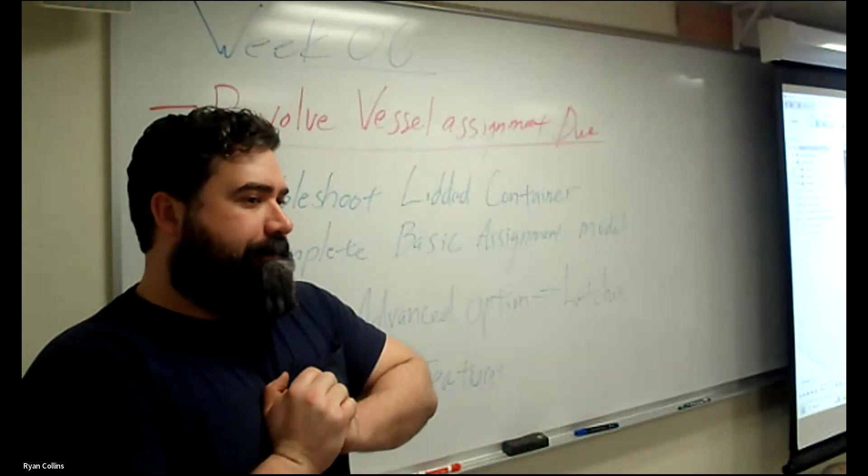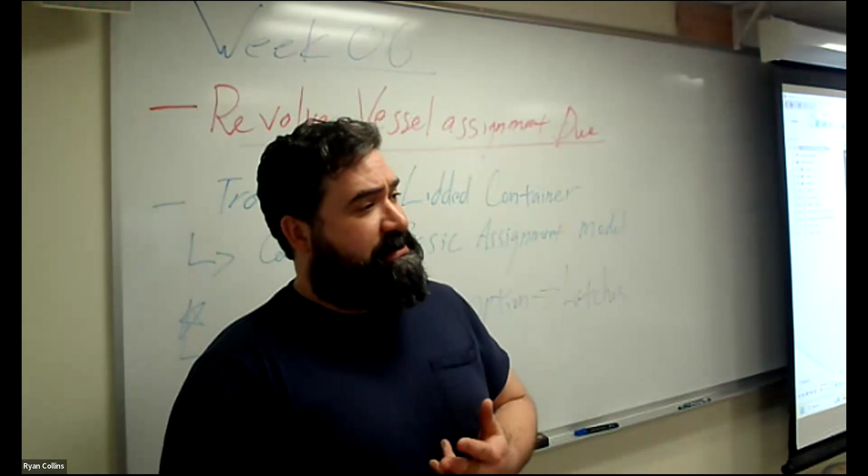Tonight we're going to add to our lidded container project. We're going to be adding some features to it, like a little thumb catch, and ideally some sort of simplified clasp. After the fact, we'll be adding more advanced options for actual functioning closing latches and additional hardware. But for the basics, let's hop back over to Fusion and work on our containers.

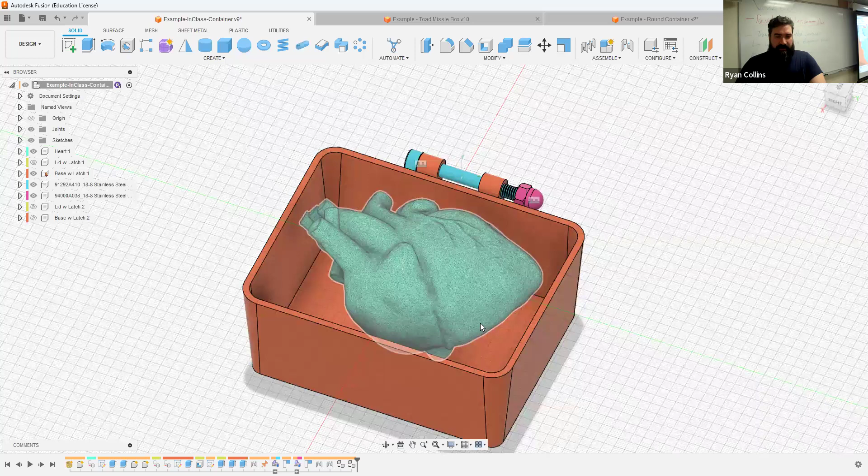So we last left off having finished making the lid. It has whatever your imported model is, in this case a heart as a mesh, which is why it's super detailed. We imported some hardware, snapped them in place with the joint tool, and set the joint limits for the container to open and close.

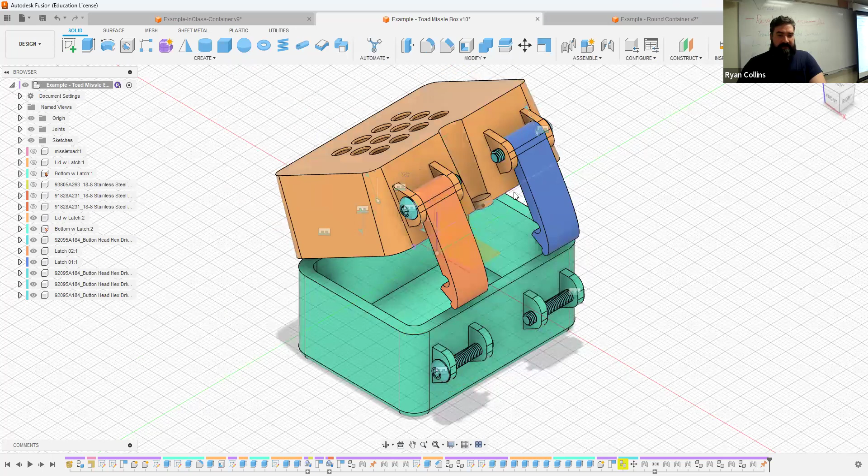So what I wanted to do tonight was go over some different options you could make on this. Let me hop over to one of the other examples, where I had added multiple latches, which is what we'll be modeling additional components to, so it actually opens that way, latches open and close, all the fun bits.

But let's simplify here, hide all of the previous versions, and switch over to my missile toad and its latches. Oh crud, I added those to that one, not to that one. All right, oh, they're copies, and they're linked. Oh well, that's okay. Ultimately I made copies of these existing objects, and they are linked.

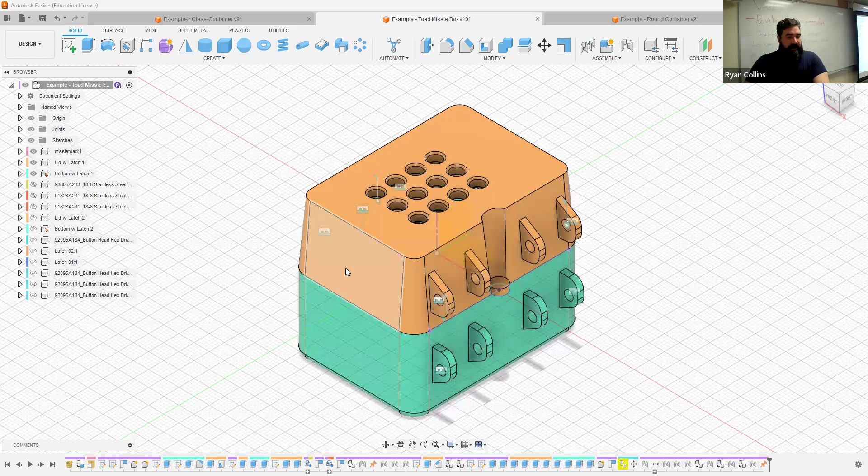So when I added the tabs and such for the additional latches, it added that too. But that's okay, doesn't matter.

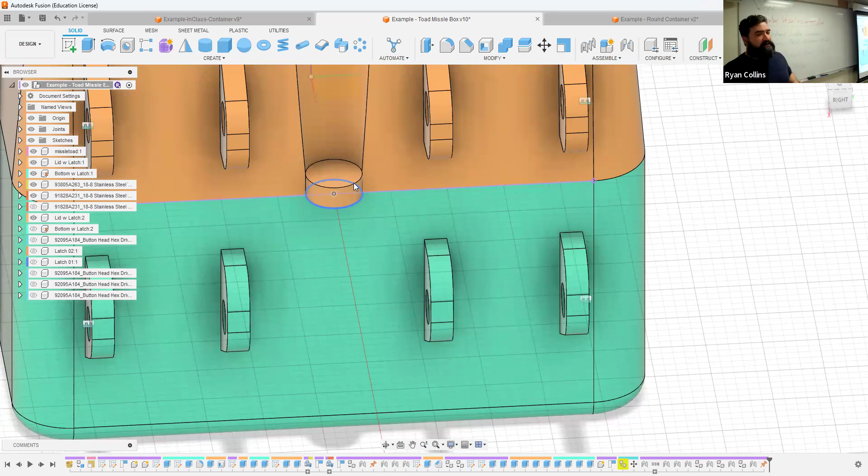So with this model, one of the things I did was add this little simple thumb catch. That's just literally a spot where your hand or thumb could grab onto the object. There's any number of options for that. That is simply one of the features required for the assignment, some sort of additional feature, as well as some sort of, or the other option is a variety of holes and such.

You could use a singular drawing, or a variety of patterns, either with the circular pattern, pattern on a path, or the rectangular pattern tool. And you could either use extrude to cut straight through, partially through, or the emboss deboss tool to have it raised, lowered, or it could be text. Any combination also.

It's up to you, but I wanted to start with just some simple options here. So let me hop back over to the model we were working on, and something like a little tab or so.

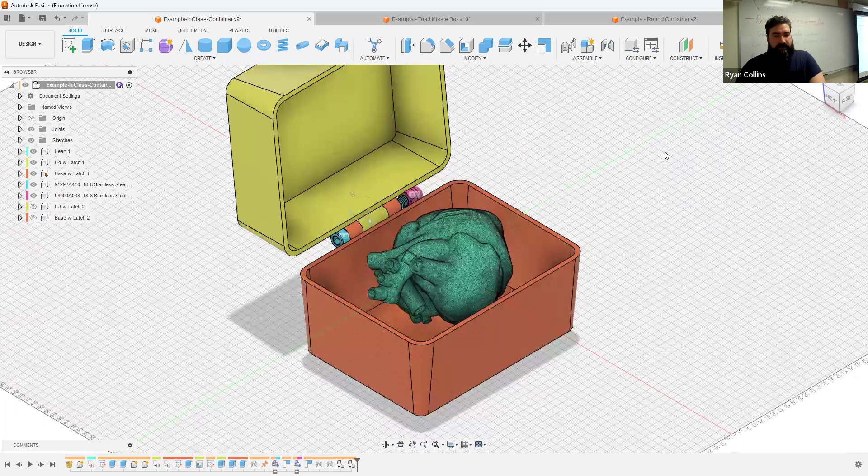Now one of the tricks to this is that depending on what tool you used to hollow out the object, it will influence how you make additions to it. If you used a shell tool that hollows out the inside of this part, you would need to make this feature prior to the shell, otherwise it's going to cut directly through this thin wall. If it's an extrude, you're going to need to go back and re-edit that original sketch. But let's work with what we got.

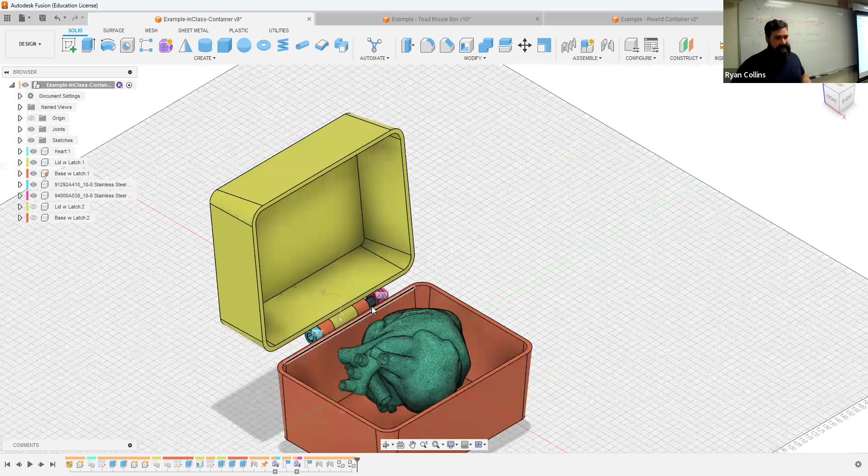I think we did the lid with a shell tool, so what I'm going to do is just model something simple like this. This little thumb catch, which is just an extruded circle, but it also projects upward with this notch here.

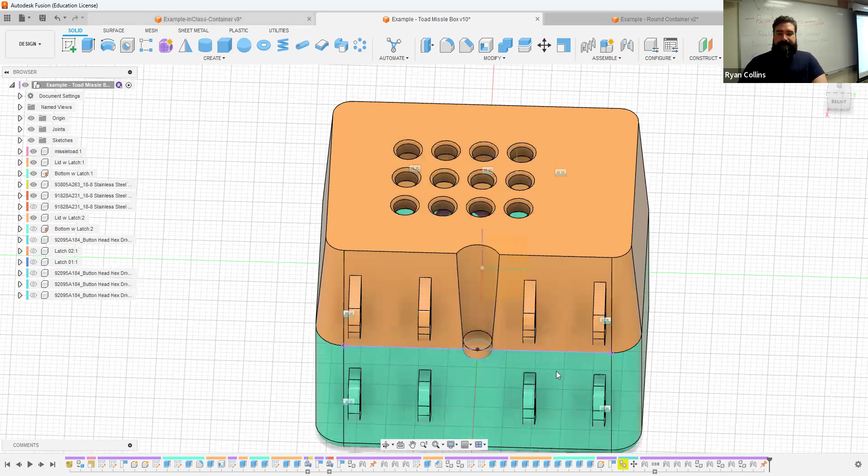And how I did this was depending on where you place this in your timeline. As we've said before, you can mix and match and move your timeline back and forth. You can swap the placement of certain tools, and that is absolutely what is necessary for something like this. This thing is always in the way, the zoom tool.

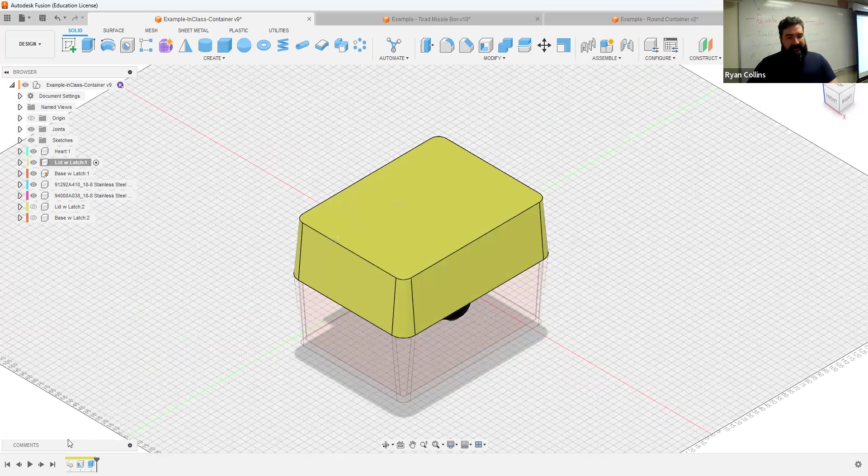So what I'm going to do for that is first off, let's activate just the lid. Well, looks like we did use the shell tool, great, but because we made the original sketch outside of any of these, I have to go back and activate the entire project to do this.

So let's jump back to the original sketch, not the heart one. That was just the basic outline we used. I'm going to go back into that, or I can add to it with a second sketch. Let's keep it simple and add to this sketch.

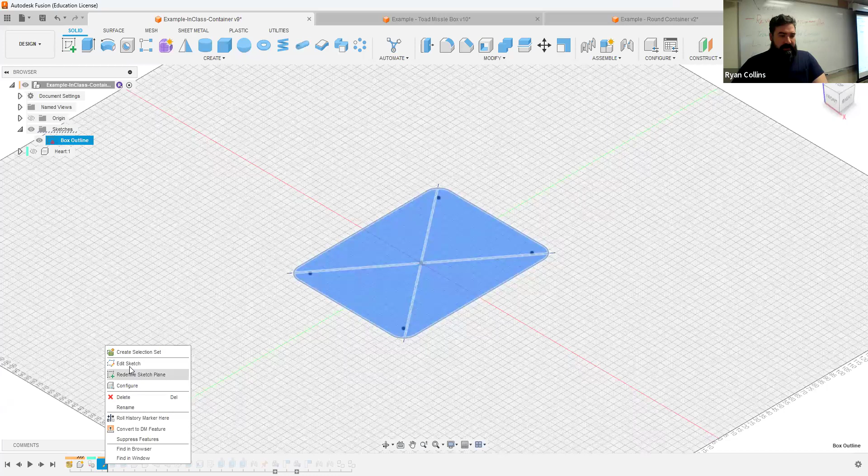Go to the sketch, mouse over, right click, edit sketch. I'm going to go to what will be the front and use the circle tool, snap right along, and my constraint tools come up. The plus sign and crosshair switch to an X, denoting it's intersecting two lines, and the triangle comes up showing it is a midpoint.

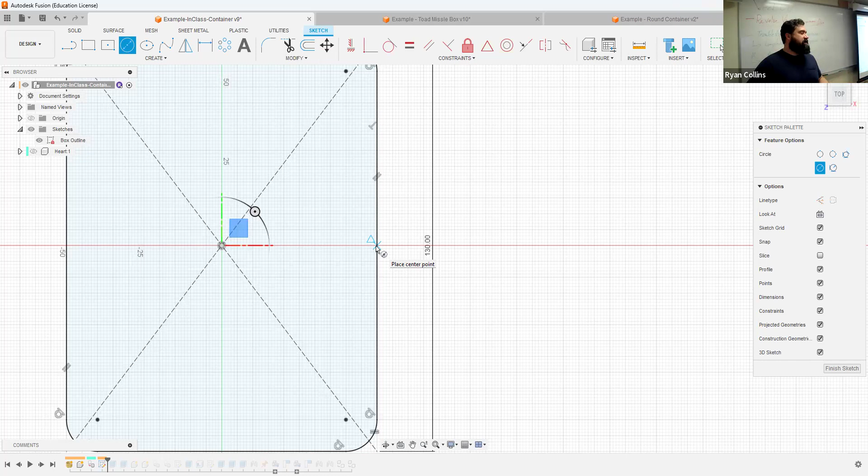I'm just going to draw a circle, maybe 10 millimeters. That seems reasonable-ish. Let's make it obscene, let's make it 20. It's just crazy, whatever, okay, just slightly larger. Great, finish sketch.

Outright, this shouldn't alter anything since I haven't selected that for anything. But we know we're going to create extrusions to make these parts, so let's edit that extrude. That was the bottom one, don't want that. We made the base before we made the lid, so make sure you got the right one.

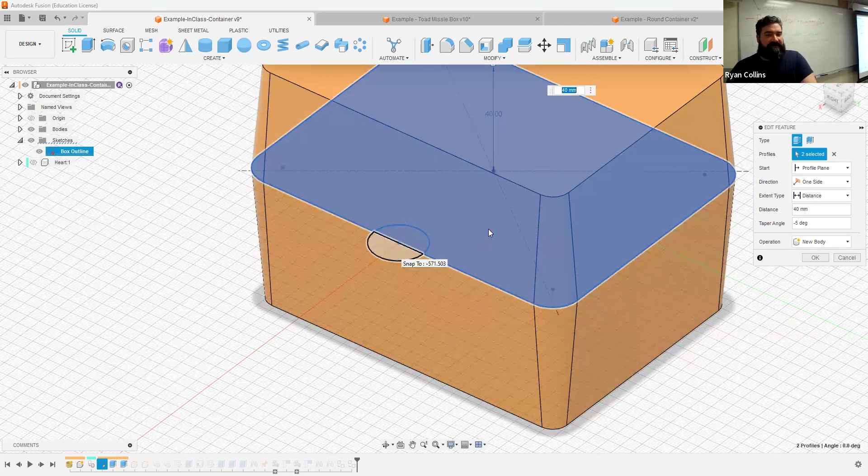So what we're going to do with this is I'm also going to select here, but that throws stuff out of whack. So I'm finding I need to create a second extrusion because this will only extrude the same height. I can only do it one height, but that's fine. That means it needs to go there, but it needs to happen before we make the shell adjustment.

There we go. Why is that hidden? Where are you? Why is it hiding from me? That is odd. Okay, that's funky.

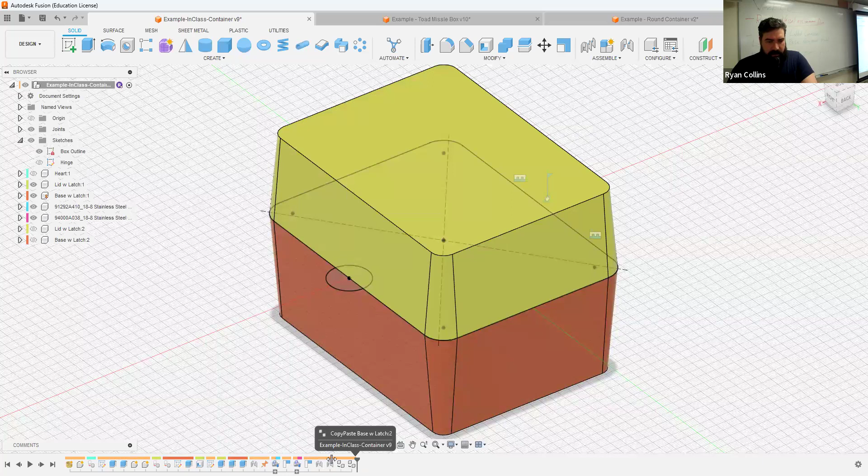Sorry, bear with me a moment, I don't know why it's hiding. I was having an issue with visibility stuff earlier today. It's physically there, but for some reason it's not showing up. Well, that's mildly irritating. I don't know. Awesome, always good to be completely flummoxed.

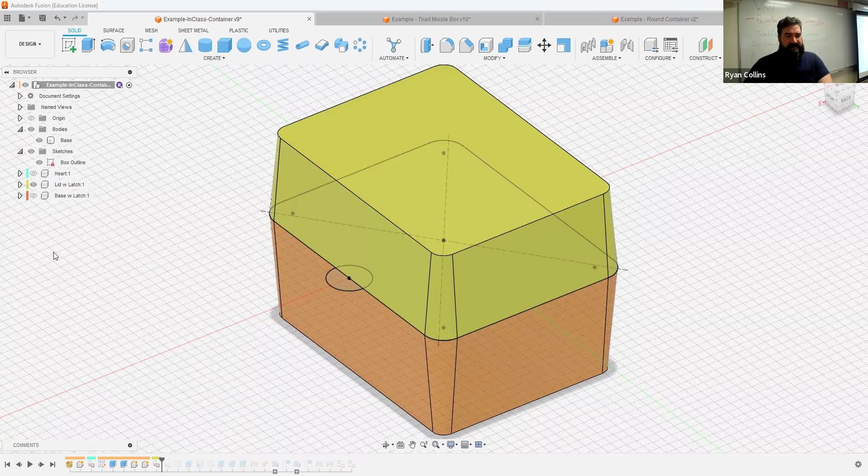It's still before the shell operation, so when I hide the base, there we go, still solid. All right, great. So from here, I'm going to extrude just that circle, but I want to make sure I get both the inside and outside, the whole thing. Not negative, I want to go positive up, like 3 millimeters.

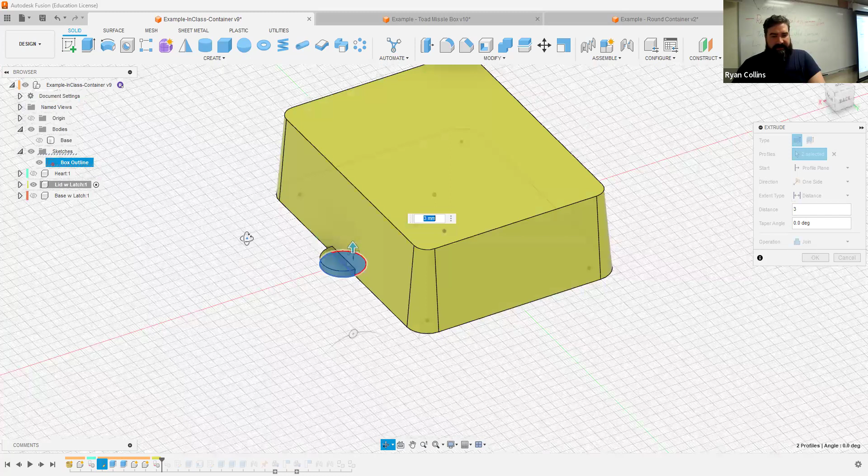Just making that little circle, not cut, I want to join that body. There we go, just making that little function there. The reason I'm doing that is if I don't have that shell tool function beforehand, when I hollow it out, it's small enough that it would otherwise not show that feature.

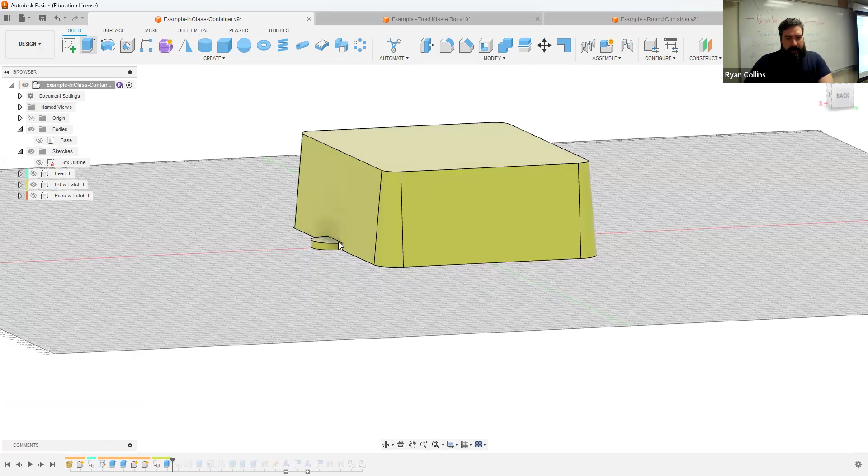But I also want to make that little recess, so I need to add an additional thing there. Let's add another extrude. And from here, of course, it hides that sketch. I want both of those.

But if I extrude upwards, now it's going to cut all the way up to the top. So let's set extent type to object, the lid, but it's going to cut everything, including the little tab I just made. So I can start the thing offset or from an object, so I don't actually have to start directly from the original plane.

Problem is it's cut right through. Excuse me, so maybe I should have made this part first. We'll find out.

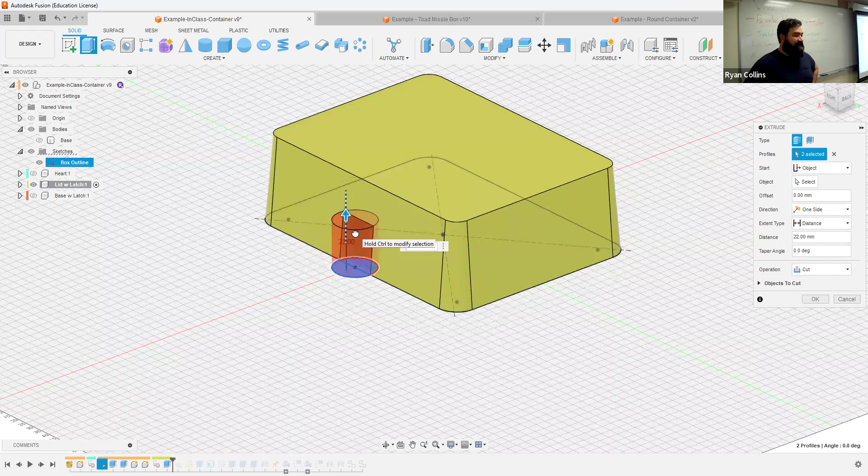Because I've already made the extrude and dragged this piece all the way up, it's not letting me show this piece. But that's okay. The reason for that is if it's already cutting through an object, it's not going to stay visible. So before you slide that part up, let's select start at that position.

There we go. But it's not... okay, great, now it's doing funky stuff. I just canceled that so it didn't cut through. Unfortunately, I've found that if you start to input information into your toolbox features, be it extrude or whatever, sometimes if you add information before you complete where it starts from, it gets a little cross-wired.

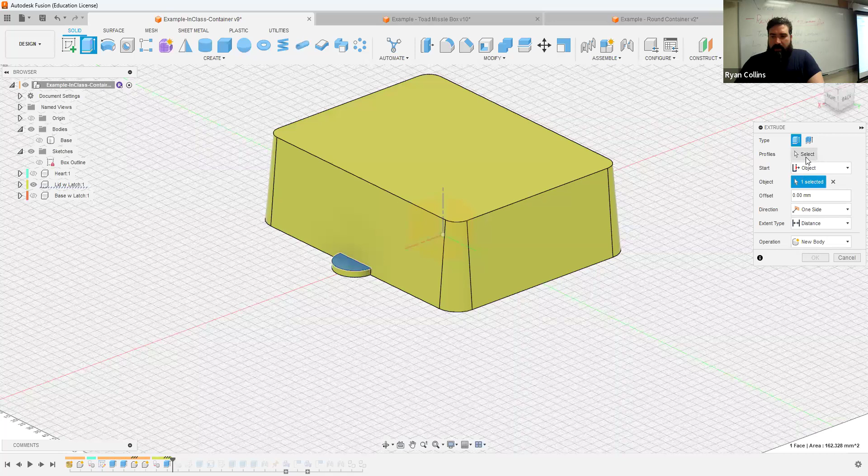So just starting over, doing what I was talking about: starting rather than at the profile plane, at the object. I'm going to select starting there. And of course, it hid my profile, so I got to find that again. I want both of those, and it's starting at that object.

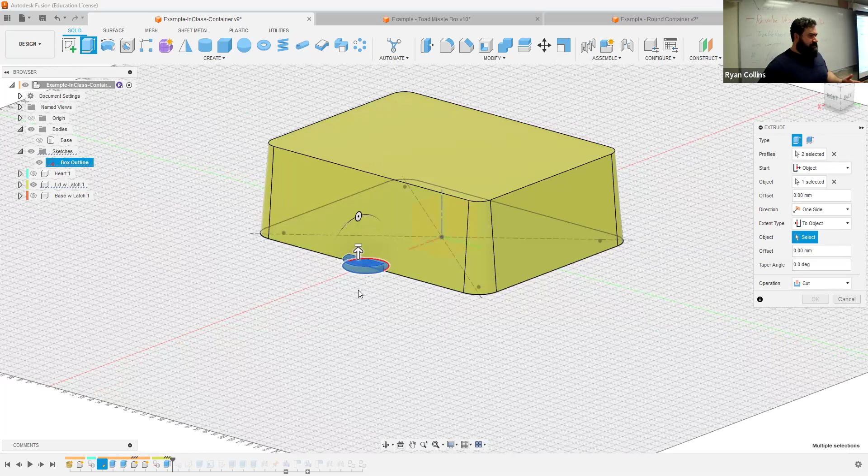Great, so now when I extrude upward, it is not interfering with that tab. And my extent type is set to object, rather than trying to remember what I measured it to - just snap to the top. Bam, there we go. So that's all, I'm just making a little cut feature in there. I hit OK, and now I just have this little thumb catch with this snazzy little recess.

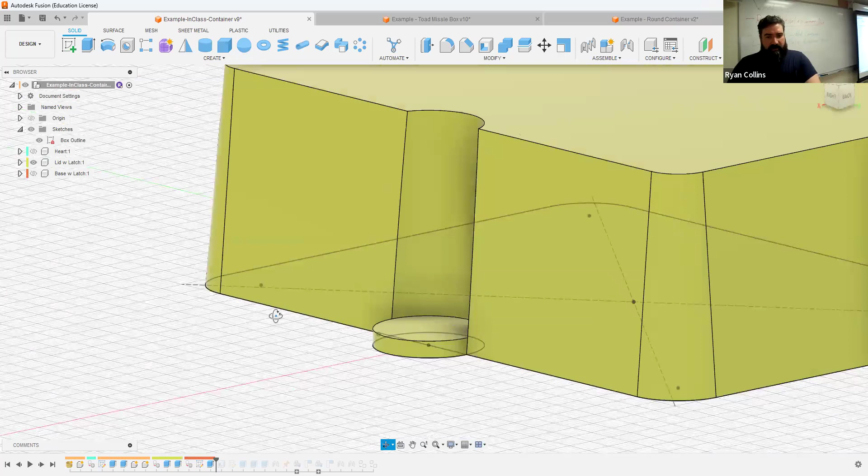So now when I go forward, let me orbit up and I'll show you what's going to happen. I'm going to move past the shell tool operation, which hollowed this whole thing out. Before, it was completely rectangular because the object was rectangular. Now, all right, so this can happen - we'll fix that in a moment. It just made the shell around that little bump out.

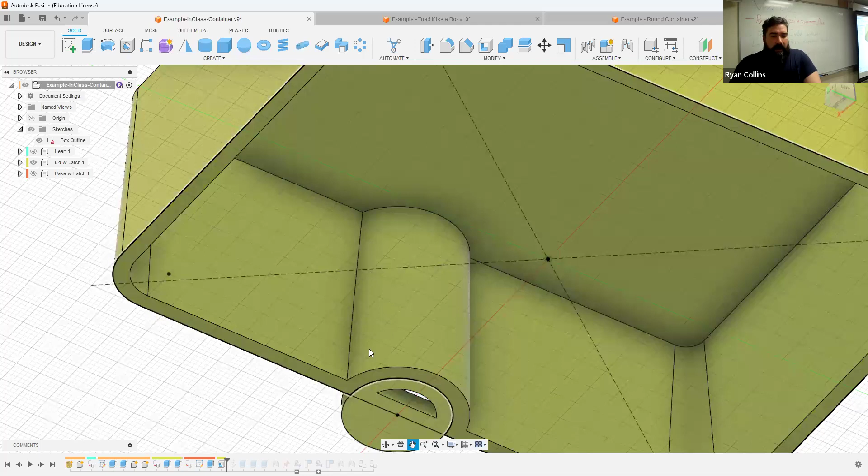So that's all, you're just making a little feature there, but it helps - it's a way to work around anything you add to it. And again, because we made this whole thing a tapered extrusion going upward, it already takes that into consideration.

Now, one of the things that can happen is this right here - excuse me, this right here. This is because this was connected to here, but the shell tool reads objects in kind of weird ways sometimes. So let me go back and double check this extrude. Did we join these together?

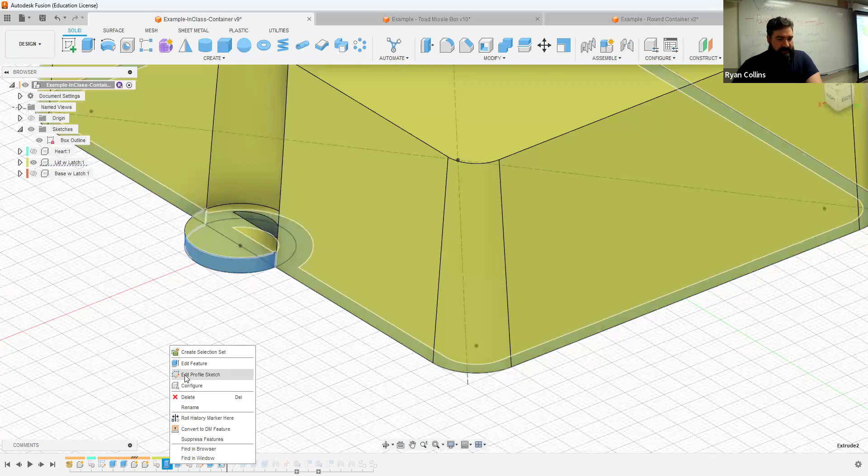We did, okay. So one way you could fix this is instead of joining this right now, let's go back and just make that a new body. Okay, it's going to recalculate everything.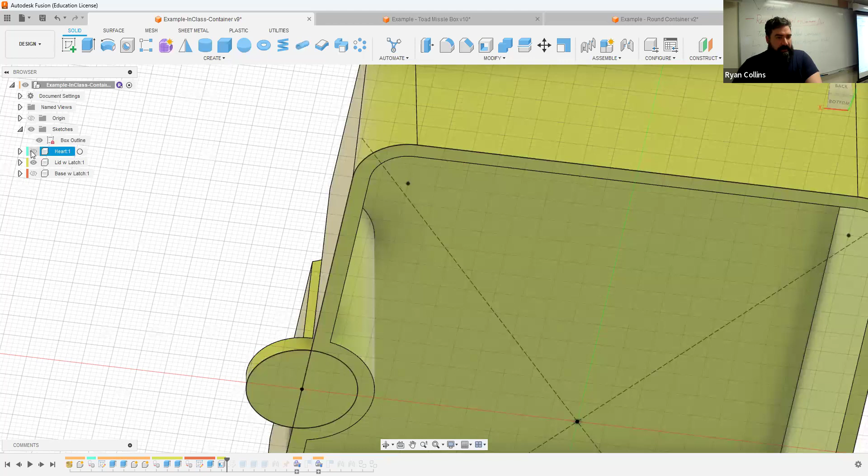So it still made my cut, but this little piece here - let me open bodies. So we still have the lid, but now we've got this little floating tab. The shell did not affect that little tab, but it did affect the extrude cut we made to create this little recess.

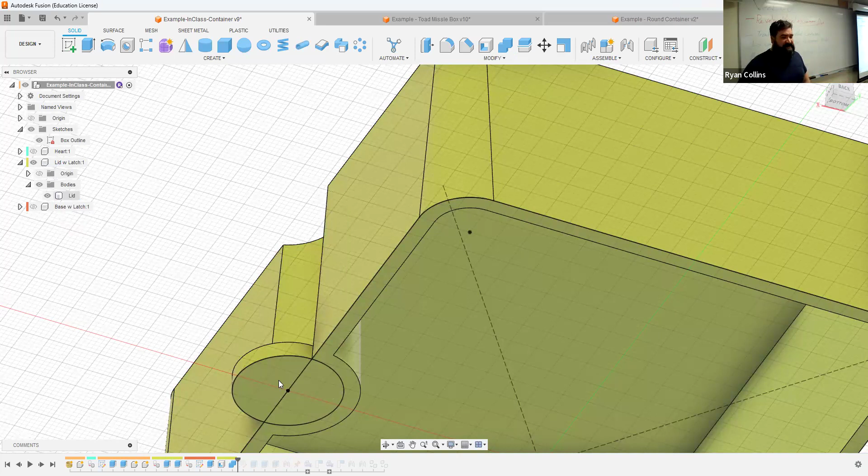So now, after we've done the shell tool operation, we can combine them - join them together, find the lid and the little tab, join them together, bonk, no problem now. So now they're joined into one object, still the lid, and it just has this fancy little tab. You make it whatever thickness you want, all that such.

But because I made this rather than dimensionally - I added this little tab and recess using extent types, meaning I'm basing it off of different heights, and like this cut here started at wherever the top of this tab is. If I realize, oh, that tab's a little too small, I can go back in and edit that feature.

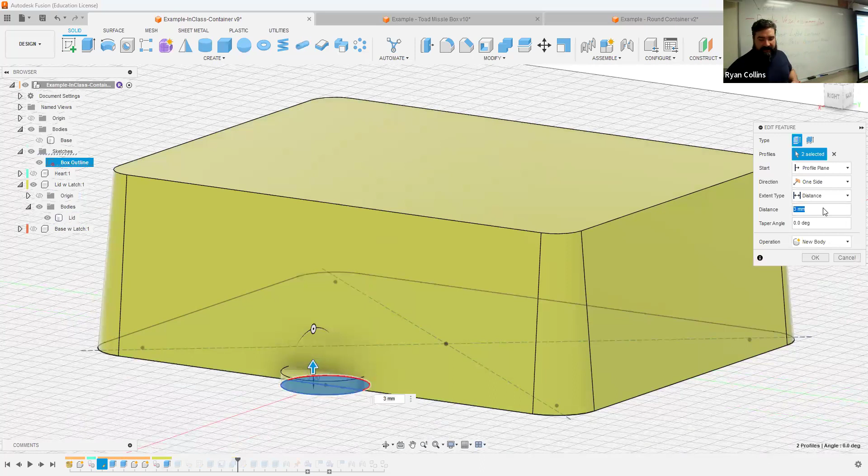Let's make that 5 instead, 5 millimeters thick. It's going to recalculate everything, still be the exact same, but starting there now. That's all, all right, so cool.

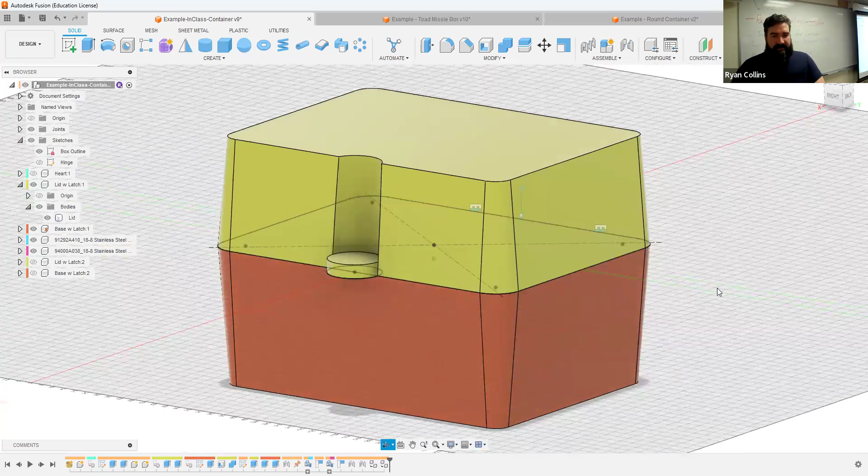That's the little tab. Seems like a lot of work just to make that, but that's also because I was running into the issue of visibility - don't know why it was doing that, but there we go. Still works, same deal, same diff, no change to our hinge or anything like that. Great, let's hide the box outline and reset.

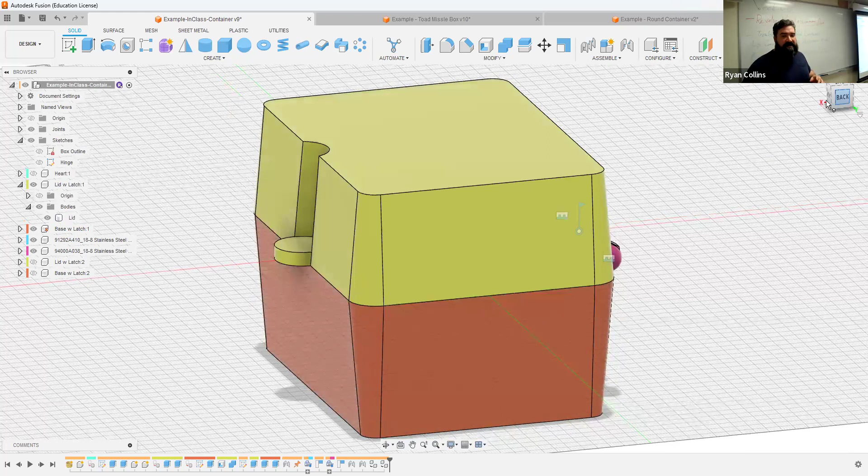So next up is just making some features and such on this. Whatever you want to do is up to you. Again, we could add text, we could do all that. But one of the main things I want to show you with this is because we made this piece taper, you can draw directly on these surfaces too.

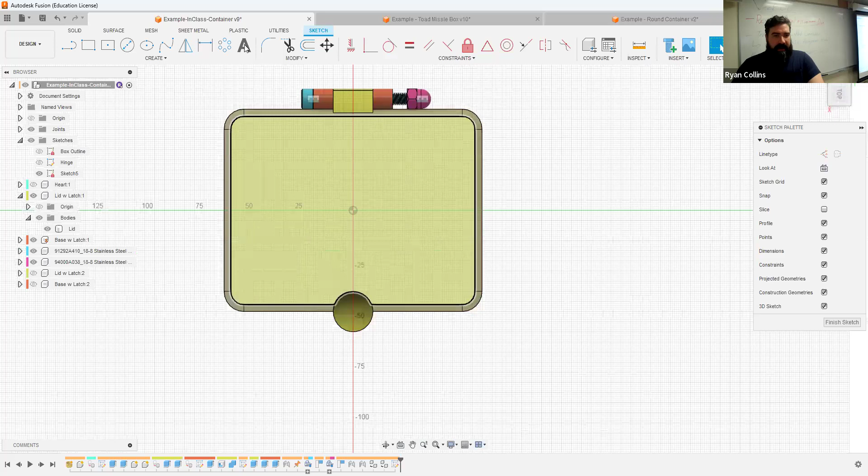So let's show a version here. On top, make a sketch. I'm going to just draw here on the top of this container. I'll rotate so I have a little bit more direct idea here. And let's make a text box, just going to start somewhere.

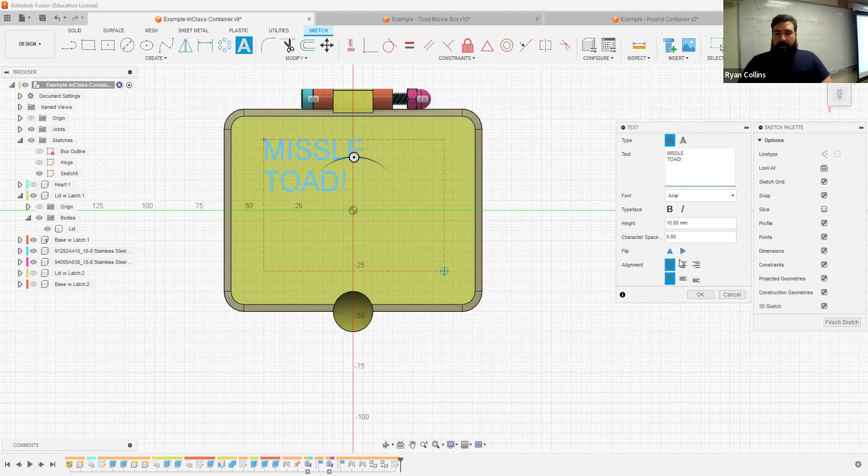Cool. Missle Toad! Because it are. And we will align to center.

Great, need to make it any of that. Font, whatever you like. Again, be careful with your font choice because some fonts do weird things. I don't know, doesn't really matter, I was just looking for something that might be funky. Classy, great, let's make it a little bit larger.

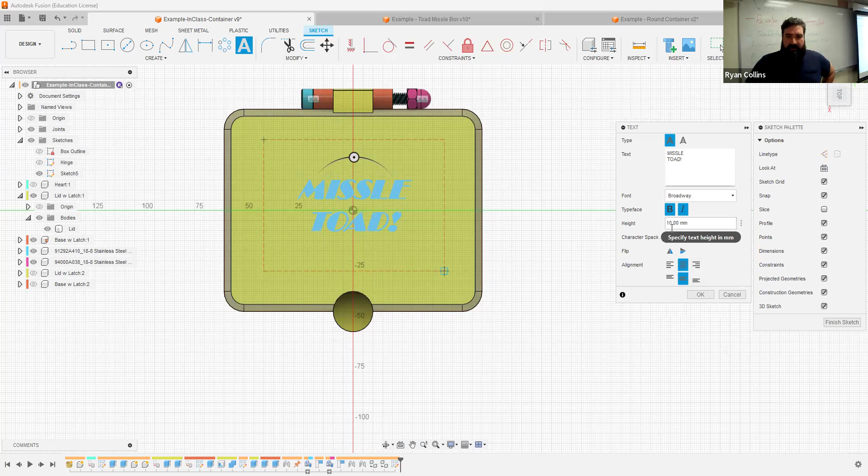Too big, back it up. Slightly more reasonable, okay great. Yield Missle Toad.

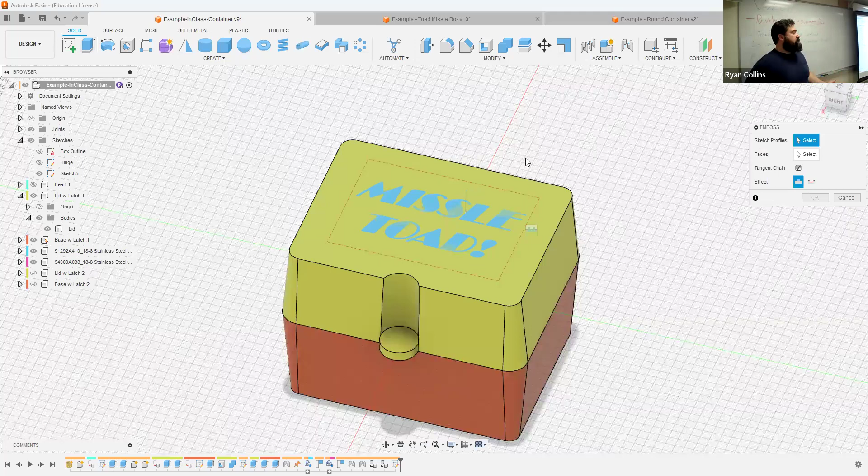And from here, you can use either the sketch or sketch and extrude, or let's play with the emboss tool just because it's better now. Now, like I said, the emboss tool will work very easily on any geometric surface.

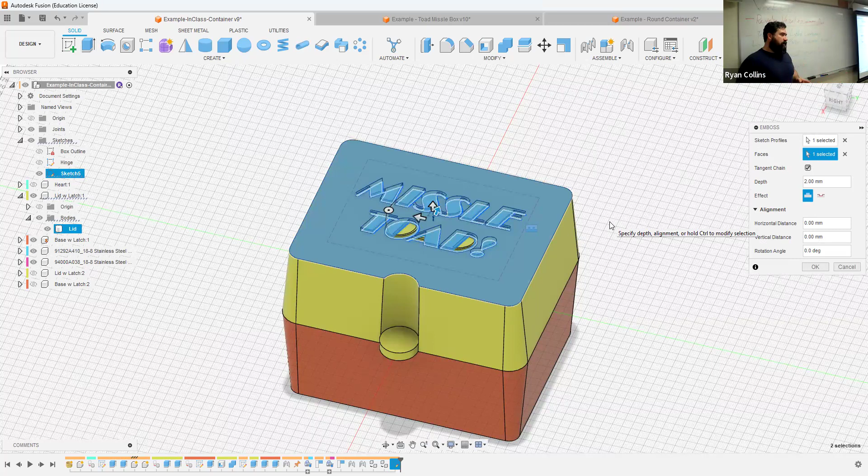So I can select the text. Faces, obviously it's on that face already, so it's not a problem. And remember, emboss goes up, deboss cuts downward. The reason I'm using emboss instead of extrude is because if this was our curved surface, it would work perfectly, but extrude would not.

So just for grins, let's go the other way, deboss. That way it doesn't cause issues if I wanted to print this upside down. Okay great, sure, whatever. So that text did not have any issues with cutting inward.

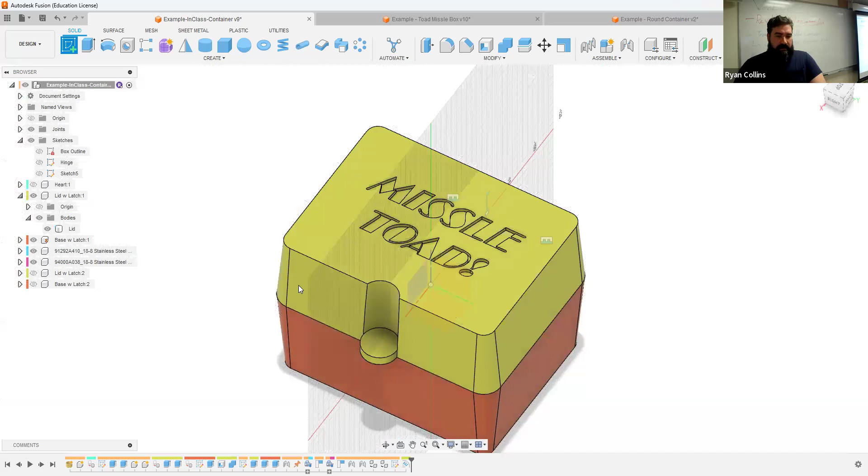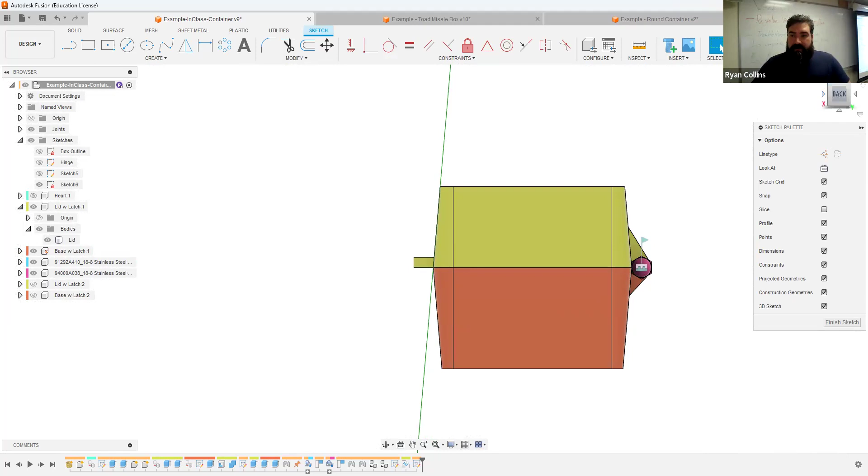Great. But what if I wanted to do something more direct on like any of these tapered elements? The cool thing is you can make sketches directly on the face and you just select that. And if I turn to the right, which in this case is now back, that's confusing, you can see how my sketch plane is actually skewed to match that angle. So that's one of the really neat things about Fusion, is that while it gets a little confusing when you're trying to select faces and things like that, you can draw directly on the face without having to align your plane to match. So something like this, it's going to build it all the way across.

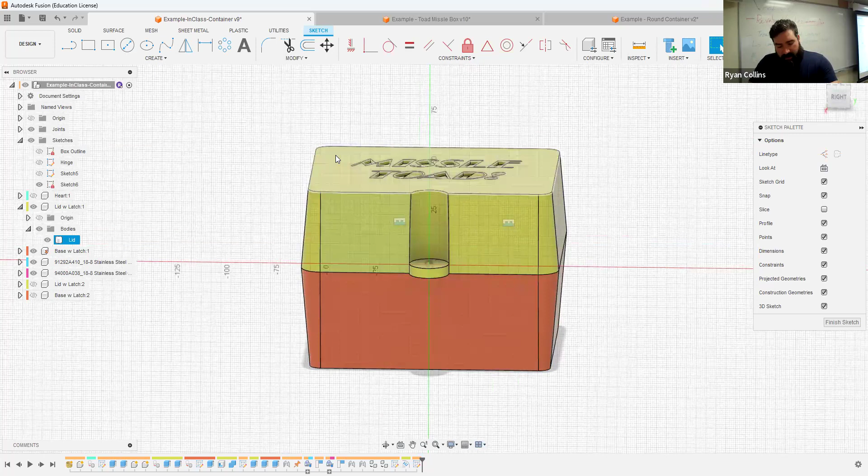Great. Snap to view, great, and I don't know, I was just playing with this. So let's make... oh, I know, let's make a projection and copy some of this part. So I'm going to use P for project, and I'm just going to select these faces just because I can.

There we go, so those little lines turn purple. The reason I'm doing that is because I just want to play with those lines and make offsets of this, so I don't know, -5. I'll show you why I'm doing this in a moment. Right click, repeat offset, -5.

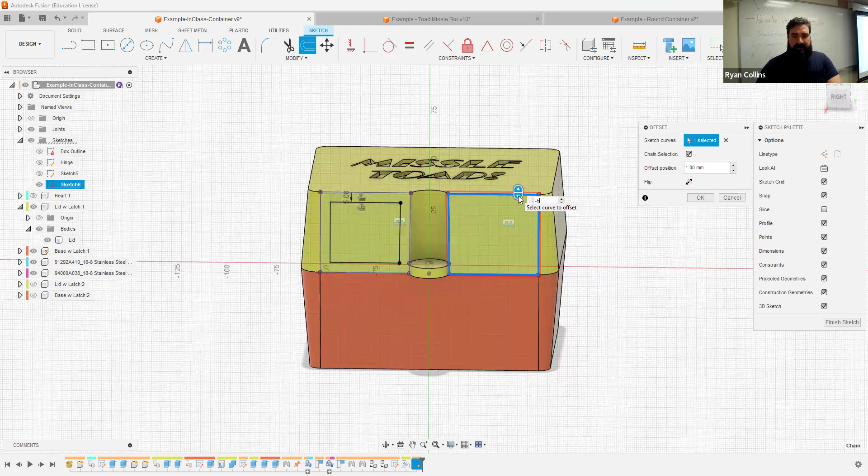There we go. So something like that can easily become an extrude or so, or again, in this case, I'm going to use emboss. That way I don't have to duplicate the angles or anything. Let me finish sketch, and if I use emboss...

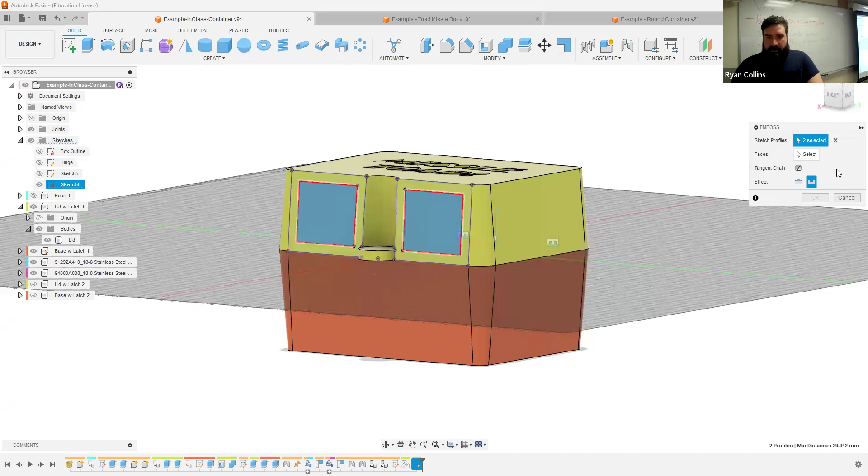Selecting both of those faces, and again, let's do deboss. And the face I'm debossing from is that one. And we're going -2, sure, why not, it's going to cut in a little bit. Hit OK, so it creates these recesses. It's just a way to add features.

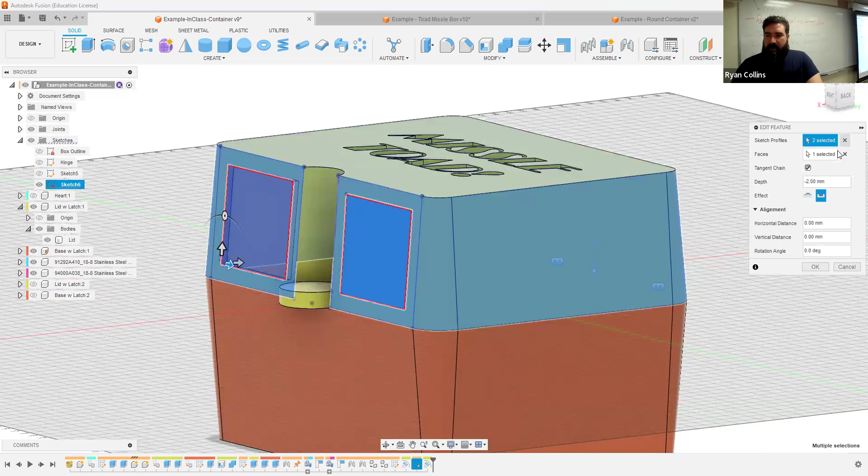Now, I didn't have both of those selected, so let me double check, or let me go back, edit that feature. Faces, I also want it to affect that one. Sometimes it won't let you select more than one.

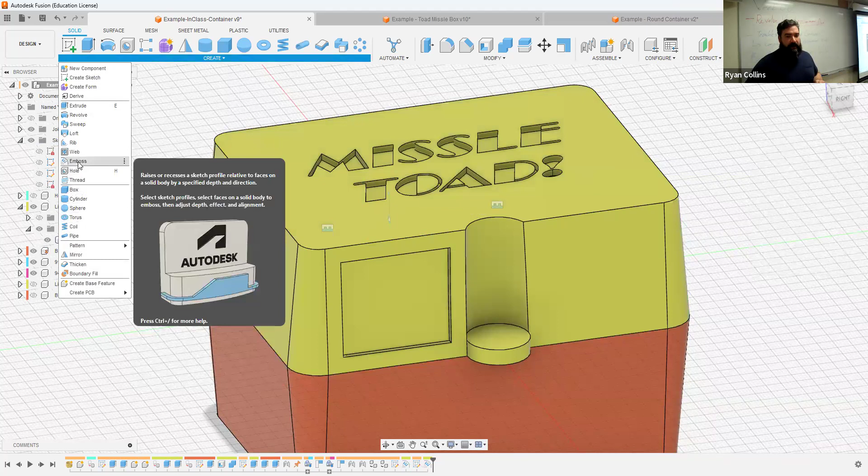Now, if these drawings were on the back side, it'd be no problem. But unfortunately, one of the drawbacks of using the emboss/deboss tools is it is limited in how many things you can select at once. So even though I selected both these sketch profiles and this face is the same face, it's not letting me select both of them. So I'm going to have to repeat that operation. So again, create, emboss. I have to unhide that sketch.

So sketch profile, that one, faces, that one. Now it's doing the exact same thing, just on that side. Oops, that's emboss, so that's higher up. That's all. So those are just a couple of different ways you can add additional features. So you could draw into things, that sort.

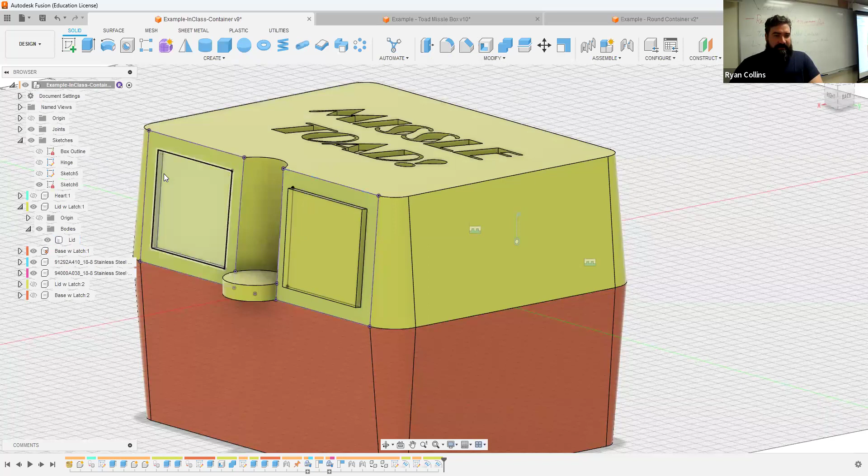So if you wanted to, let's make this slightly more reasonably printable. Put some chamfers on this, because if you're trying to print with solid overhangs, it gets a little funky. So I'm selecting chamfer, just selecting there. This is already a 2mm deboss, so it's cut in 2mm.

Let's try 1. Doesn't quite get there, because obviously it won't. 2, slightly too much for some reason. So let's try 1.9. I don't know why I'm having to creep up on this rather than it being exact. Probably because emboss and such isn't an exact cut in.

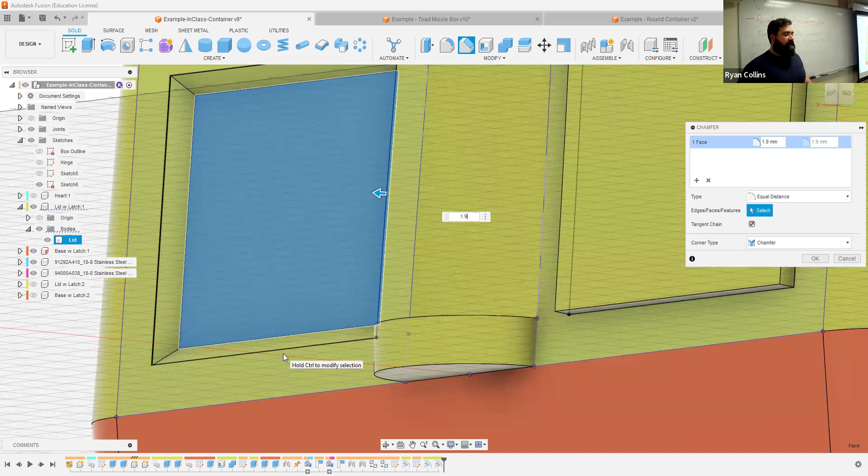But there you go. The reason I'm adding this chamfer, this kind of window frame thing, is that if we were to print this, rather than it having to span an entire flat plane, it has this little bit of a chamfered corner there. Do the same thing over here, just to show you the versions.

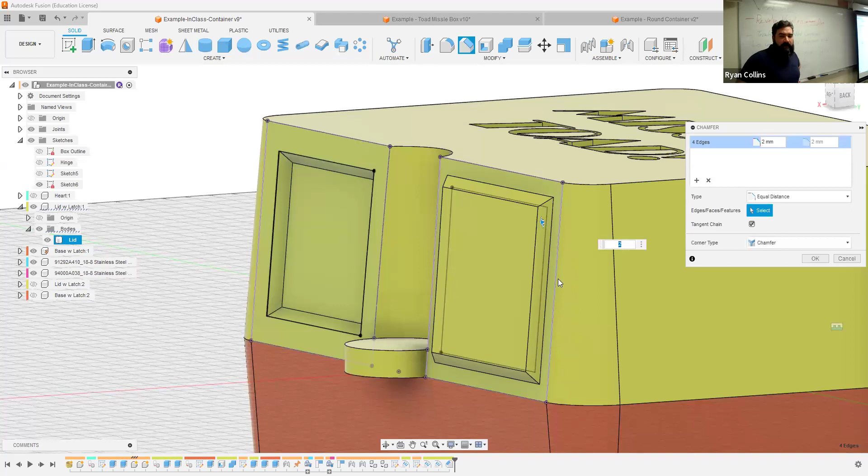I have to go around and select all of the edges here. And let's see if it lets us do a 2mm. That one it does. So maybe Emboss is working better for what we're trying to do. And let me hide that sketch so we're not getting confused. So there you go, just a way to add additional features onto your container.

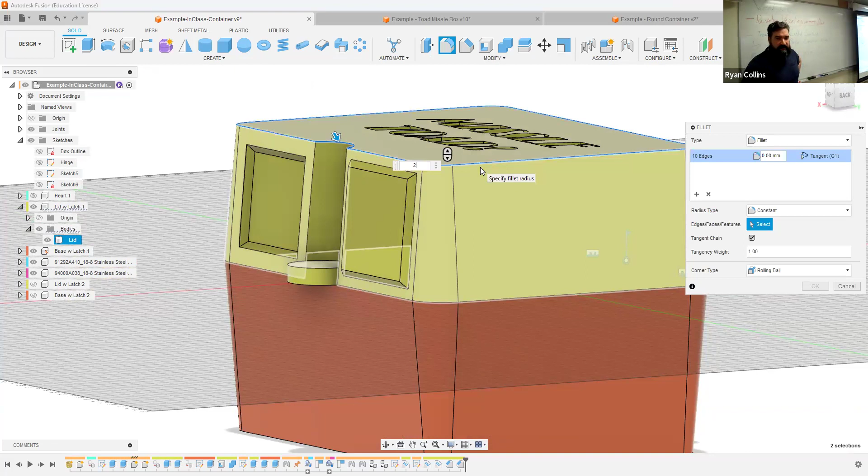Now, it probably would have been better, because I'm making these sections like this, to have added any sort of fillet to the top corner here before I did that. So let me just select that upper edge. I want to make sure I'm also getting the little cut in, and let's say a 2mm fillet. Great, it does not interfere. So great, it didn't interfere with it that time.

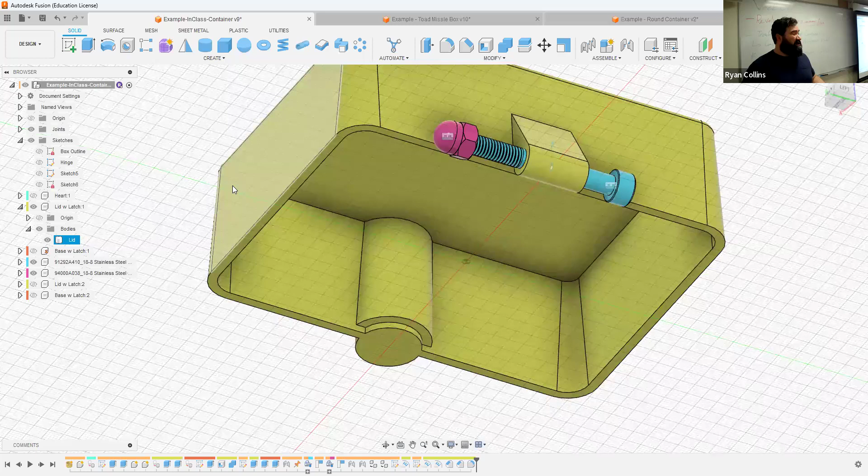But again, one of the other things here - let me hide the base. Because I'm adding that fillet after the fact, it doesn't show up on the inside. Now, those windows, those features, not translating inside, that's a good thing. It makes it easier to print. But it might have been easier to have that fillet show up on the inside as well.

So you have a couple of options for that too. You can either place that fillet prior to the shell feature, or just go in and add a fillet to this, selecting the whole bottom. There you go, easy peasy. Again, the reason you want to add fillets to some of this stuff is a sharp corner can be a weaker print.

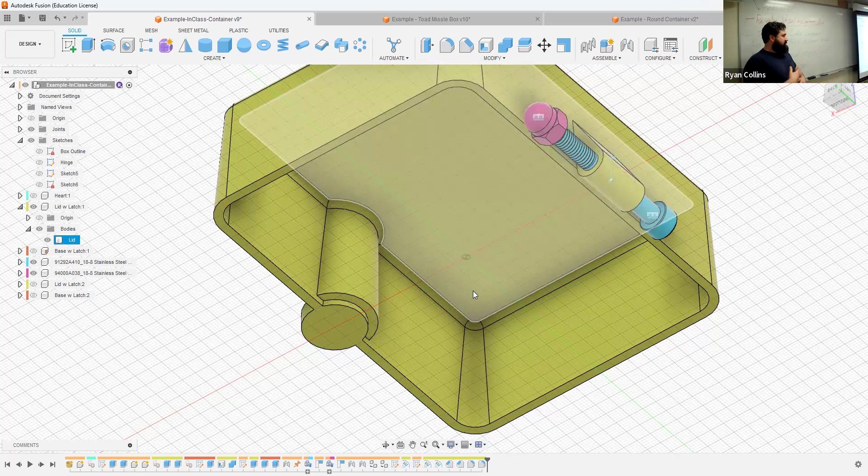A slight curve to that inside edge can improve both the strength of the print, and sometimes it can kind of speed things along just a skosh. Not a lot, but enough. All right, so that's the lid. That's a little thumb tab. That's some snazzy features.

Main thing with this is we want to add little features, that sort of thing. Again, you are required to add these sort of things, whatever you want - text, features, holes through it.

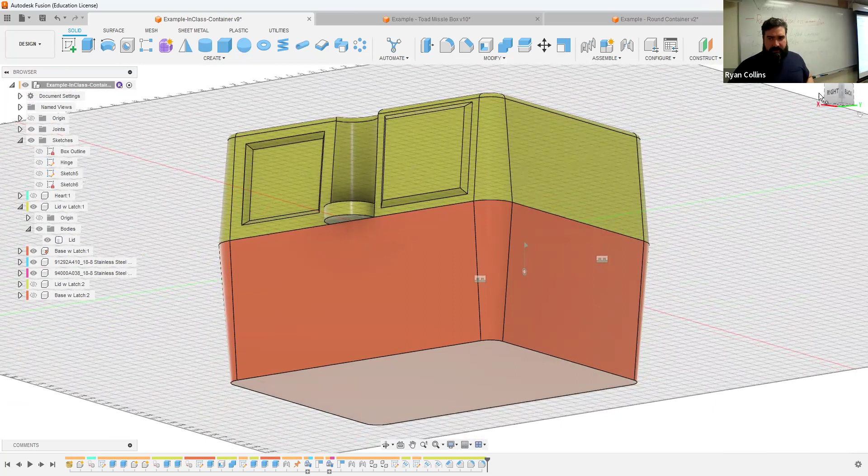It's up to you. The one other thing would be switching back to color mode and applying some appearances to it. So you just press A after hitting Shift, Shift N, to go back from auto color mode to component mode to just your appearance mode. And here, yeah, pick a bunch of stuff.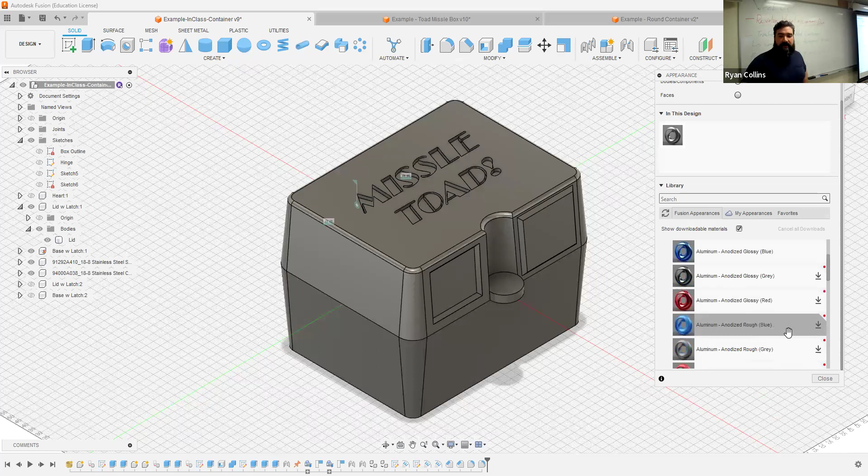I did notice that there's some new appearances that have shown up, specifically in metal - there's now anodized aluminum colors. So heck yeah, glossy red. Why wouldn't you want a sweet, sweet anodized container for your missile toad? It's gone. Oh, I forgot, this is for the heart.

So the text on top of this is just outright confusing intentionally. Forgot what model we were working on. All right, so there's your variety of stuff.